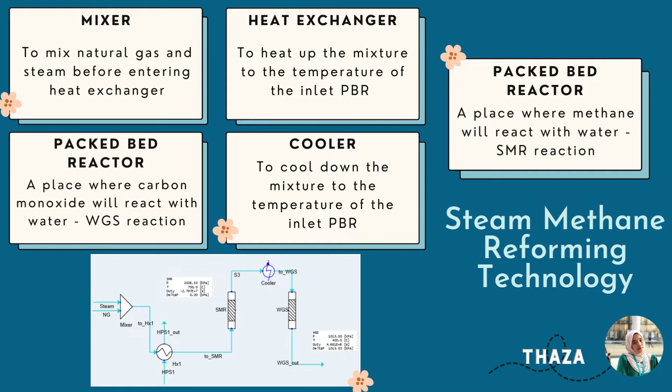To design a successful SMR technology, fixed packed bed reactors are favored over other reactor types due to their simple technology. Besides, PBR has a low operational cost as it is a continuous operation and requires less manual labor. Hence, two packed bed reactors are utilized, one used during steam methane reforming and another in the water-gas shift reaction.

This reaction is assumed to be a steady-state reaction with perfect mixing, in which there is no spatial variation in the radial direction, resulting in constant temperature, pressure and catalytic activity. Next, gases are assumed to be ideal and there is no side reaction.

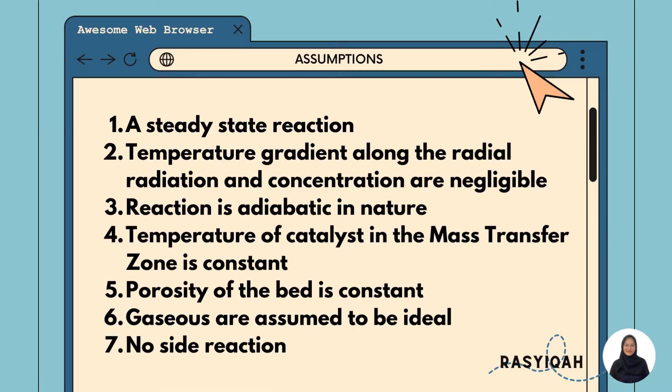For the SMR reactor, the catalyst needed is nickel oxide as it is able to perform well under cyclic redox conditions of chemical looping steam reforming, as well as in tandem with high temperature. The catalyst is supported by aluminium oxide as it was discovered to have high reactivity and no agglomeration towards the reaction.

The volume of the reactor is calculated using a 5-step method. Firstly, mole balance, which is derived from the general equation. Secondly, rate law, calculated using a formula from literature using Xu and Froment kinetic parameters. After the stoichiometric table is generated, the formulas are combined algebraically. The last step is to evaluate the formula analytically to get the catalyst weight needed for SMR, which is 262.72 kg.

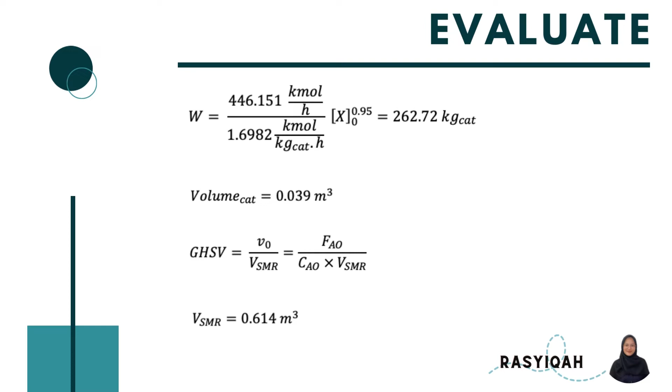The volume of catalyst can be calculated by dividing the weight with density, and the gas hourly space velocity from literature is used to calculate the volume of reactor, which is 0.614 m3.

For the water gas shift reactor, the catalyst needed is iron oxide as it can withstand high temperature, is cost-effective and environmentally friendly. The volume of the reactor is calculated using the same 5-step method.

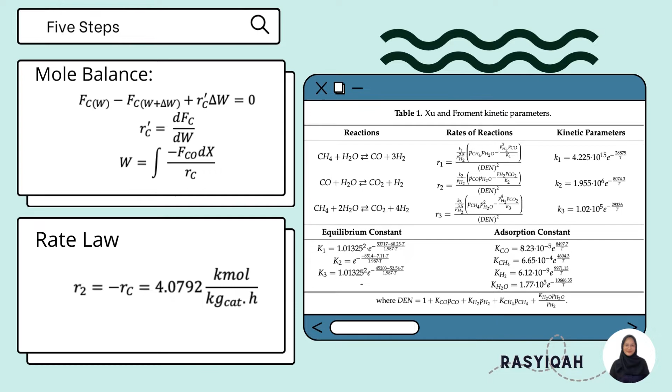Firstly, mole balance, derived from the general equation. Secondly, rate law, calculated using a formula from literature using Xu and Froment kinetic parameters. After the stoichiometric table is generated, the formulas are combined algebraically. The last step is to evaluate the formula analytically to get the weight needed for WGS, which is 98.71 kg of catalyst.

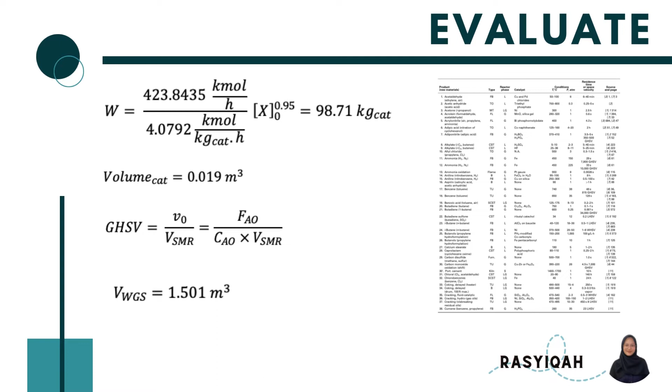The volume of catalyst can be calculated by dividing the weight with density, and gas hourly space velocity from literature is used to calculate the volume of reactor, which is 1.501 m3.

Next is the strategy to maximize selectivity and yield of hydrogen gas. The first is increasing the concentration of methane in the SMR reaction, because the stoichiometric number of H2 in reaction 1 is 3 times more than in reaction 2. Raising the concentration of CH4 in reaction 1 will increase the number of moles of H2.

Next is increasing the inlet temperature entering the PBR in the SMR reaction. SMR reaction is an endothermic reaction, and since endothermic reactions favor high temperature, increasing the entrance temperature into the PBR in the SMR reaction will improve conversion and H2 yield.

Next, decrease the inlet temperature entering the PBR in the WGS reaction. WGS reaction is an exothermic reaction which favors lower temperature. The lower temperature in reaction 2 will increase the conversion and yield of H2, since it will be produced more under low temperature conditions. The selectivity of the desired product H2 will also increase.

Next is increasing the concentration of water. Since water acts as a reactant for both SMR and WGS reactions, a higher concentration of H2O means a higher concentration of reactants for both reactions, which will enhance the yield of H2, as it will be produced more when the concentration of H2O is higher.

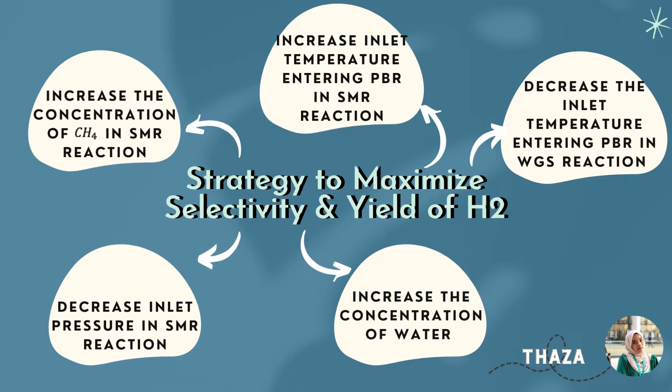Lastly, decreasing the inlet pressure in the SMR reaction will not only affect the selectivity and yield of hydrogen gas, but will also minimize the side reaction, because the pressure helps limit the energy contained inside the reactant molecules of the side reaction. Therefore, the side reaction barely occurs since the reactant molecules cannot achieve the activation energy of the side reaction.

Now let us move on to CEB 2053 part of the presentation.

The objectives of this part are firstly to simulate the reaction process of hydrogen production using the symmetry software. Secondly, to validate the simulation by comparing with the manual calculation from CEB 2043. Lastly, to perform sensitivity analysis discussing the effect of temperature, pressure, feed flow rate and composition.

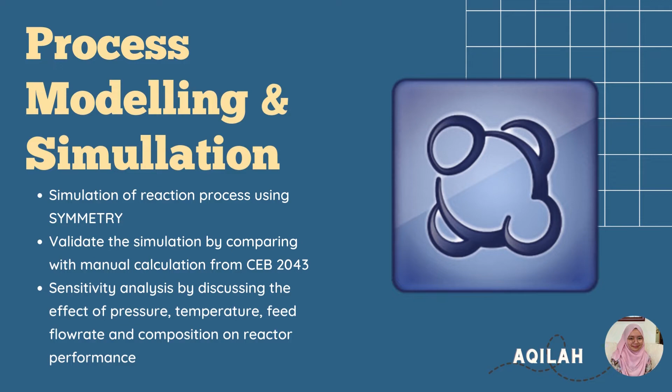Some of the assumptions made to simplify the model include firstly that the whole process inside the system is in steady state. Secondly, the composition of the natural gas stream is 100% methane. Next, side reactions in SMR and WGS are neglected, and lastly, the reactions involved in the system are elementary reactions.

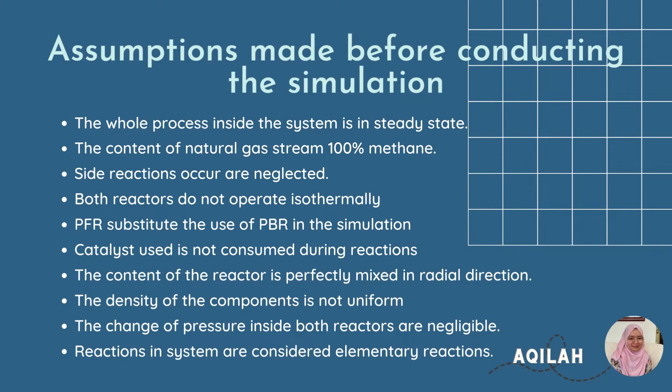Steam and natural gas are mixed and fed to the heat exchanger since the reaction of steam methane reforming is highly endothermic, so heat energy is needed for the reaction to occur at constant temperature. In the SMR reactor, water will react with methane to produce carbon monoxide and hydrogen.

After that, the temperature of the reaction mixture is reduced to 400 degrees Celsius before it is supplied into the WGS reactor, so the carbon monoxide and water can further react to form carbon dioxide and more hydrogen.

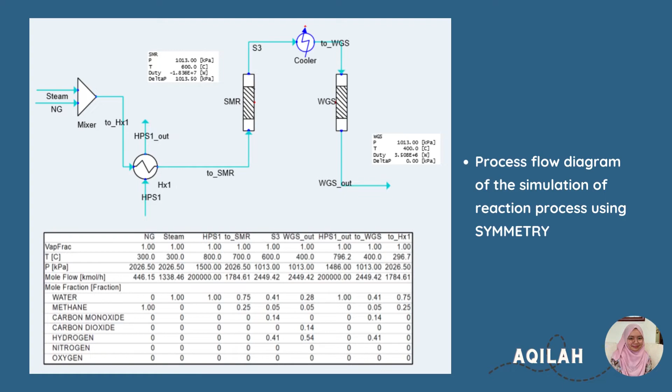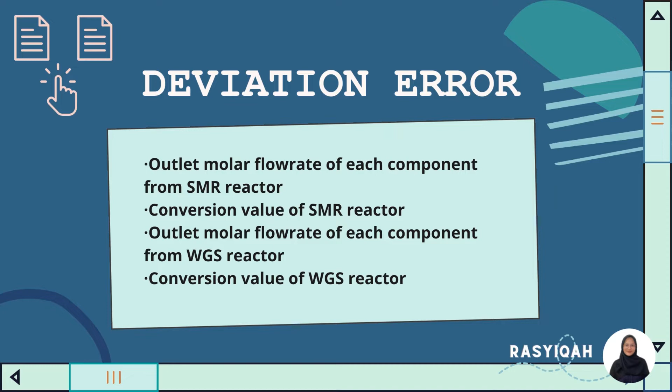The deviation errors can be calculated by comparing values from manual calculation from the reaction engineering course with the values from the symmetry software. The values to be evaluated are the outlet molar flow rate of each component, as well as conversion value from the SMR and WGS reactions.

The conversion value can be calculated by dividing the molar flow rate reacted with the initial molar flow rate, as shown on the screen from the symmetry software. Then, the deviation error is calculated using the formula circled in red right now.

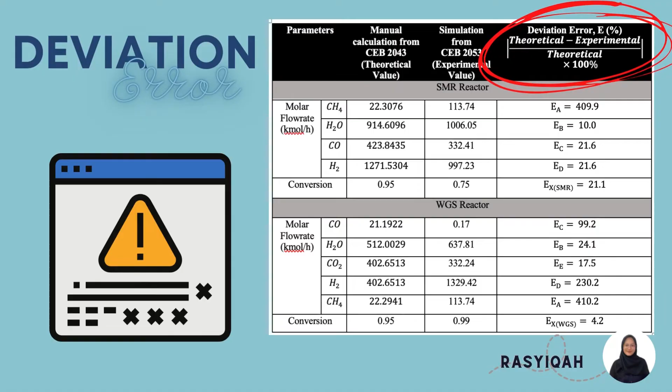It can be seen that there are some parameters that have a really high deviation error. This is due to the difference in formula used to calculate the rate law.

For manual calculation, the rate law is taken from literature using the Xu and Froment kinetic parameters, while the simulation calculates the value of the rate law by assuming that the reaction is an elementary reaction. However, for solid catalyzed reactions, the overall order of the reaction is not an integer, as the rate law that should be used is a non-elementary rate law.

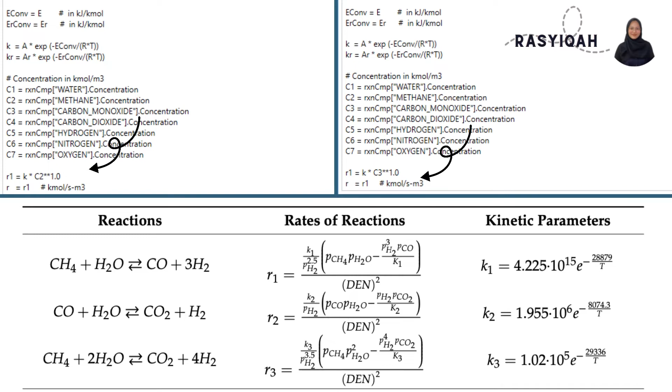Sensitivity analysis is carried out using the case study function in symmetry. Since the main desired product of this whole reaction is hydrogen, the flow rate of hydrogen and its fraction in the outlets of SMR and WGS are determined as dependent variables during this analysis.

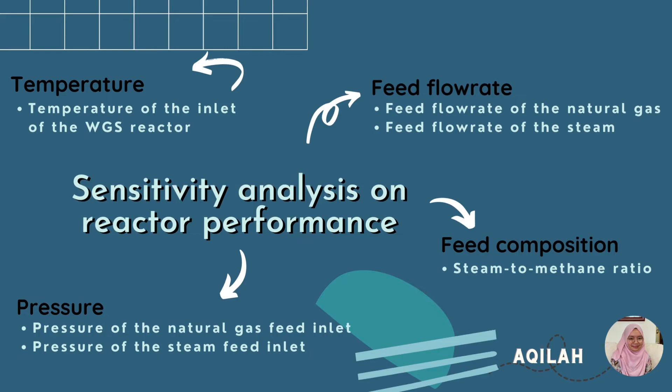Firstly, for pressure sensitivity analysis, as the pressure of steam is increased from 100 to 1500 kPa, the line graphs are nearly stagnant, which means even a significant increase in the pressure of steam and methane will not really affect the yield of hydrogen. Hence, it is preferable to maintain the pressure as low as possible, but not too low until the hydrogen yield is reduced extensively, considering worker safety and cost saving.

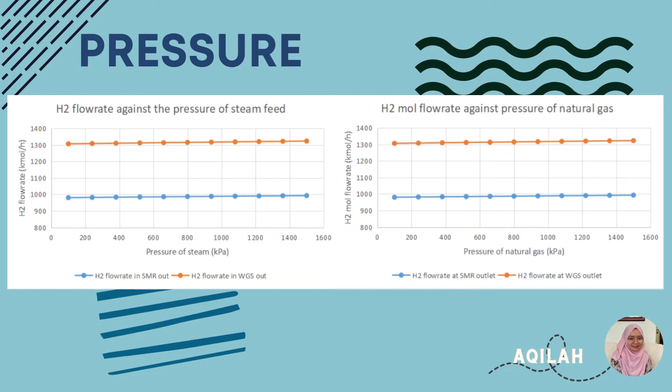It is also deduced that the results obtained in both graphs are of the same values. This is because as the pressure of one of the streams is increased, both streams eventually enter a mixture, where a new pressure and temperature is generated.

Theoretically, by referring to Wojcik et al. 2018, as temperature is increased, the hydrogen yield in WGS should decrease. This is because high temperature would limit the reaction equilibrium, resulting in more formation of carbon monoxide.

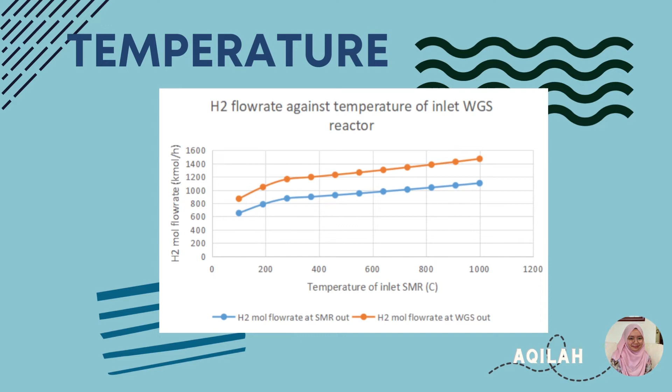However, the results obtained in the simulation are against the theory, due to inaccurate activation energy and pre-exponential factor assumed, as well as inappropriate feed conditions. Although as temperature increased, the hydrogen mole flow rate increased due to the elevated reaction kinetics, hence producing more product.

Moving on to the feed flow rate sensitivity analysis, the graph shows a gradually increasing trend for the mole flow rate of hydrogen at both outlets of the SMR and WGS reactors as the natural gas feed flow rate is increased. This is simply due to the increasing amount of reactant molecules to produce more products.

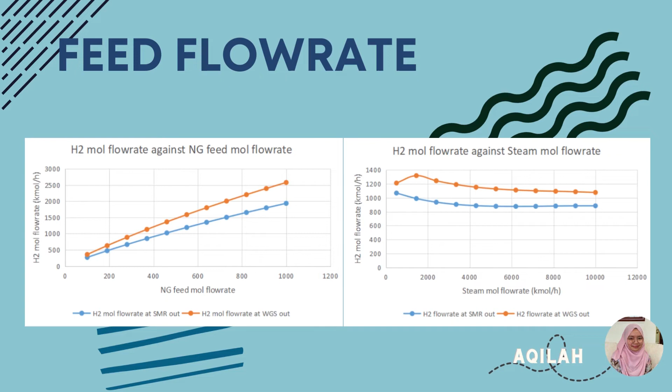Oppositely, increasing the steam mole flow rate will not increase the production of hydrogen in both SMR and WGS reactions. Referring to the graph, the most optimal flow rate to maximize the yield is 1450 kmol per hour. If further increased, it will no longer favor the reaction as methane has become the limiting reactant.

Lastly, for the feed composition sensitivity analysis, we decided to use the steam to methane ratio instead, so we can evaluate the ideal ratio in producing the highest amount of hydrogen.

According to the graph on the left, when the ratio increased to 3.5, the fraction of hydrogen at SMR outlet is the highest, while at the WGS outlet it is around the ratio of 5.5. This means the optimal ratio range for the reaction in SMR and WGS would be between 3 to 5.

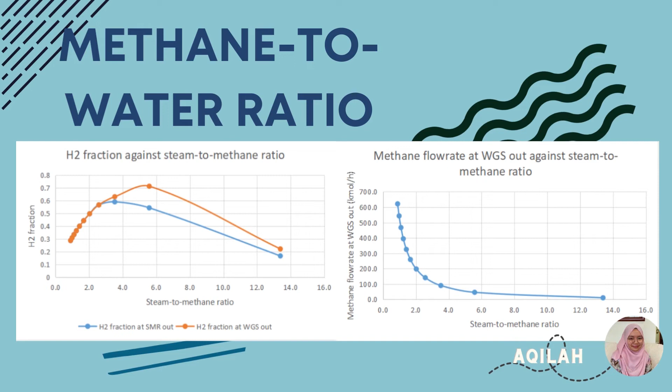Based on the graph on the right, it is deduced that the ratio and the methane flow rate are inverse to each other. This is because a higher steam to methane ratio means more steam is supplied in excess. Hence, more molecules of methane will react with water until eventually leaving no residue left in the outlet of the WGS reactor. This explains why beyond the ratio of 6, the line graph approaches 0.

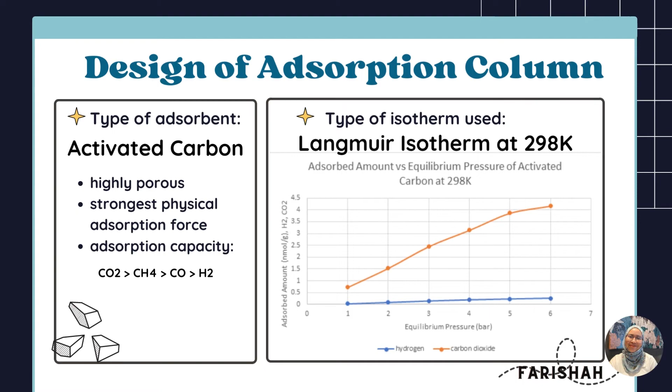Next, the type of isotherm used in the adsorption column is the Langmuir isotherm at the operating temperature of 298 Kelvin or 25 degrees Celsius. Lastly, for the design of the adsorption column, we are going to determine the MTZ, diameter and total height of the adsorption column.

Shown below at the left-hand side is the concentration profile for adsorption in a fixed bed at various positions and times, and at the right-hand side is the breakthrough curve of carbon dioxide for activated carbon. The value of TT and TU is found to be 25 and 12 minutes respectively.

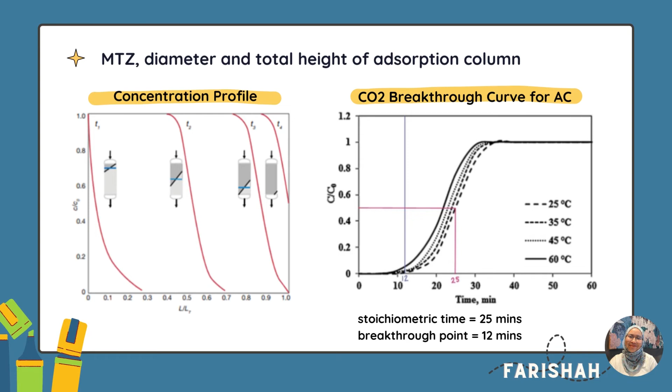In order to calculate the MTZ and diameter, a few assumptions need to be made: the total adsorption column height is assumed to be 2 meters, the volumetric flow rate is assumed to be 84 liters per minute, and the feed velocity is assumed to be 0.6 meters per second.

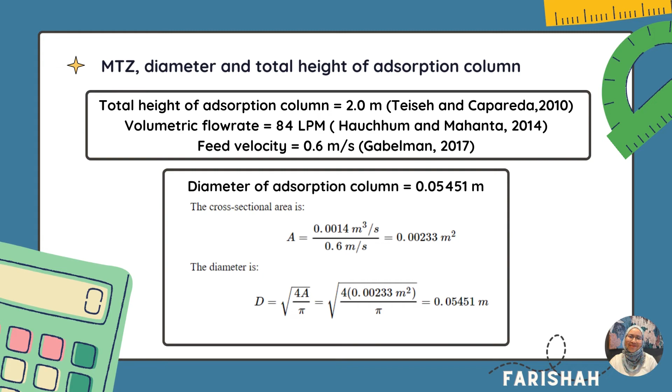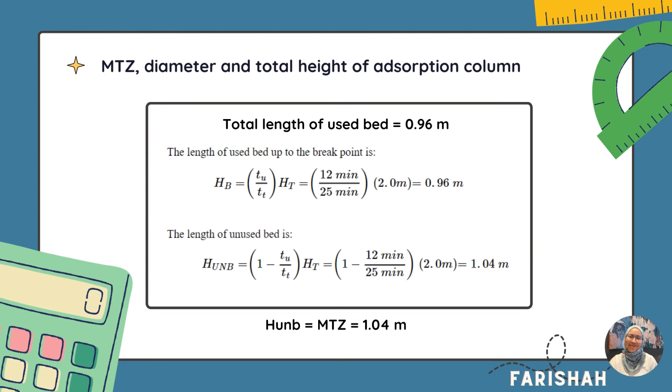From the calculation, it is found that the diameter of the adsorption column is 0.05451 meters. Moving on, the total length of the used bed calculated is 0.96 meters, while the length of unused bed is 1.04 meters. Since the mass transfer zone is represented by the total length of unused bed, therefore the mass transfer zone MTZ is also equal to 1.04 meters.

Design of separation unit. In this gas mixture separation process, polymers are commonly used as membrane materials due to their attractive selective properties and high processability. A polymer composite membrane with polymer support is used, which provides support and mechanical strength to the membrane. This membrane material was chosen because it can reduce stage cut when the working pressure increases.

At lower stage cut, the separation efficiency of CO and H2 will increase, which subsequently increases the recovery and purity of hydrogen gas. For the membrane type and configuration, hollow fiber membranes with small diameter, lower than 1.5 mm, were chosen. The reason for choosing hollow fiber membrane is because it has a very large surface area within an enclosed system, which results in increased separation efficiency.

Other than that, it also uses moderate energy, which can reduce energy consumption. As this membrane can be manufactured in different diameters, the hollow fiber module can be widely used for streams with different flow rates at low cost.

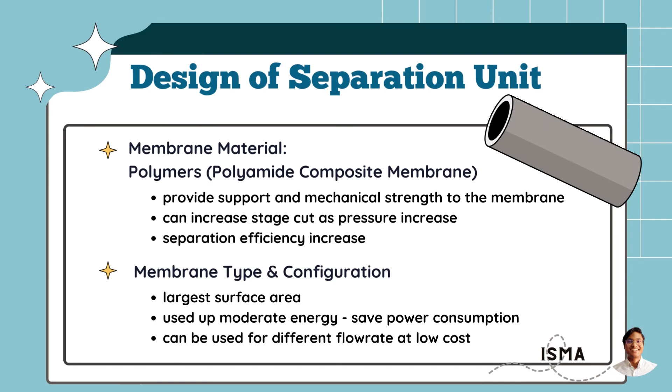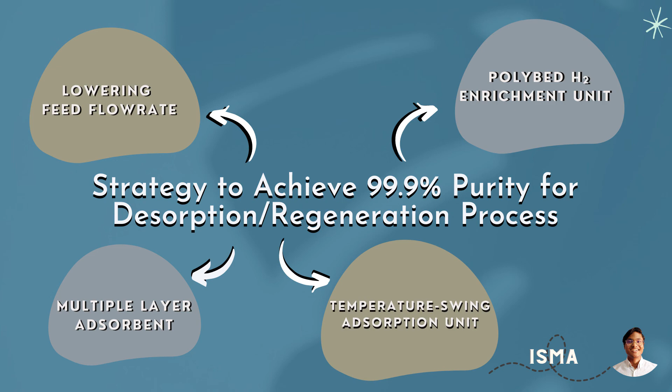The carbon dioxide removal process favors low temperature and high pressure by using the temperature swing adsorption unit, governed by Henry's law.

Lastly is the Gibbs reflective cycle. For the description part, this project is to design 30,000 tons of hydrogen gas with a purity of 99.9%.

Next, the feeling throughout the journey was a lack of interaction in the starting phase, and we recognized that some members were uncooperative. However, ideas were shared between the members, which was quite good as an evaluation for this project's journey. We also analyzed that weekly meetings could have helped the progress, while teamwork among members and research articles helped us to route the IDP.

Also, we concluded that time management and sense of responsibility are important, and a Gantt chart should be implemented for a smoother IDP session.